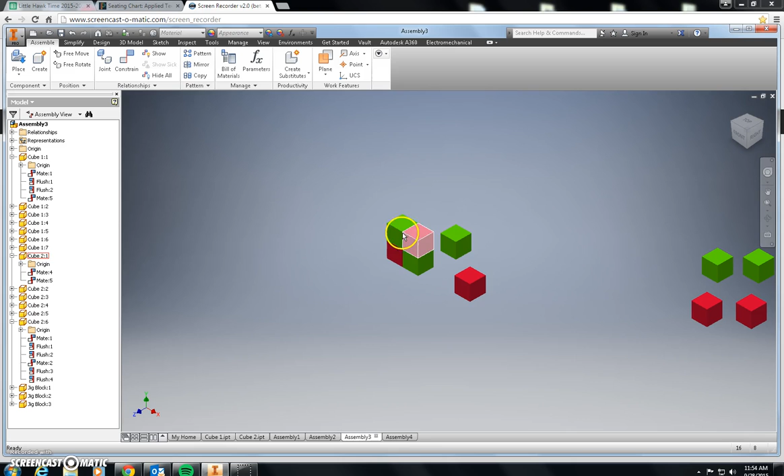As we speak, I'm recording this for later, so if you have a problem, you can watch this video. Here's what I did with the last class: we took a green and a red cube and put them together, making this piece using the most basic connections we can make in this class. We started by making these two objects and saving them. If you make an object and do not save it, it cannot be used later because it technically doesn't exist until it's saved.

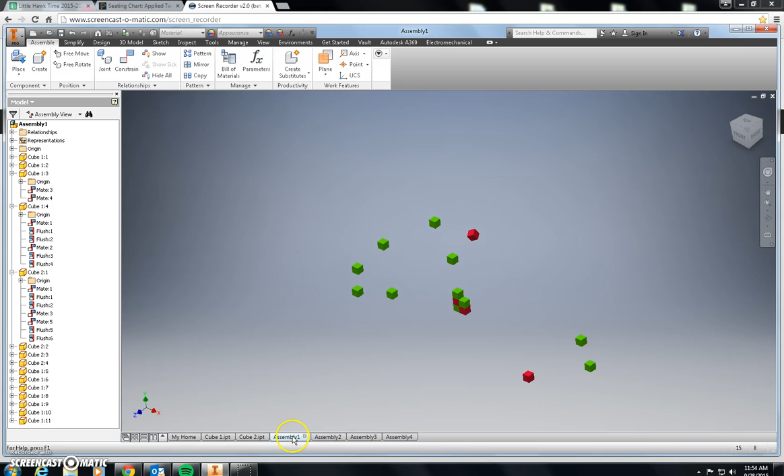So I'm going to show you how to open this assembly area, which is basically the workbench. If you look down here, I've been working all day on stuff. So I've got an assembly here, another one, another one, another one, and the original cube 2 and the original cube 1.

I'm going to open a brand new assembly area. Go to the upper left hand corner and go to the new tab. We'll drop down the menu, and instead of choosing part, you're going to choose the assembly area. If you take a look at the picture, an assembly has 3 cubes connected together, and a part is only a single cube. So just look at the picture, it tells you what to do.

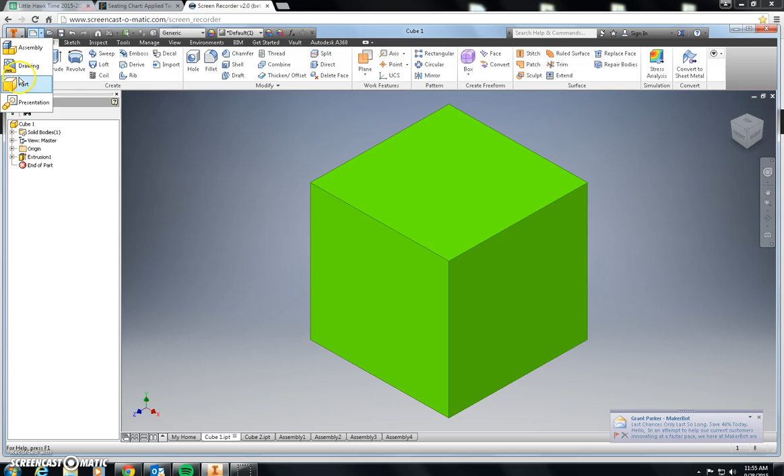So let's choose assembly, and now I have an empty workbench. There's nothing at all in there. So I need to do what a human would do, which is place objects within the workbench. This area here called Place is important—this is where you will find the work that you've created. Now there's a drop-down menu, and inside of there are some interesting things.

For instance, this one we can use later: Place from Content Center. Inside there is essentially the entire store Menards and the entire store Ace Hardware. Anything you can buy at Ace Hardware exists in there, like nuts, bolts, washers, and things. Why make them if they could be bought off the shelf? So everything in here can actually be placed in your object, in your workbench.

But I'm going to go find something I made. So I choose the Place option, and the first thing the computer asks is please tell me where it lives. So wherever you've saved it, you need to look in and drop. In my case, I went to the desktop, and I'll scroll down to my 2 cubes here. I'm going to click on cube 1 and click open, because that's the first one I'm going to put on the board.

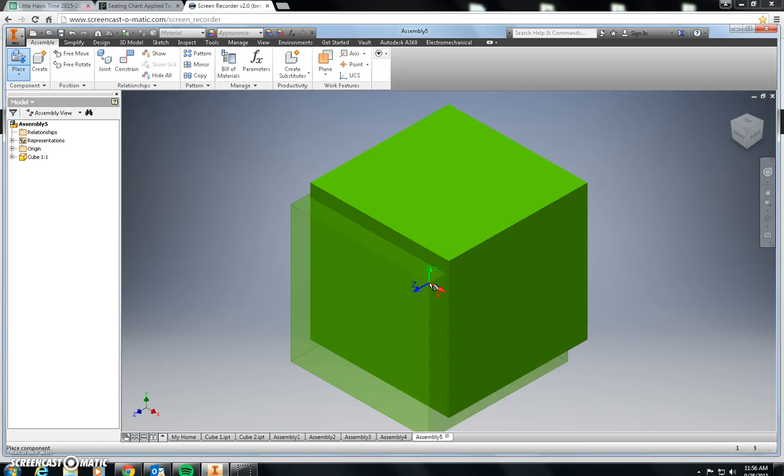Now it's hard to tell, but I'm zoomed really close, so I'm going to zoom back and click one time. Now there's my first cube. Notice I'll zoom out again and I still have a cube attached—every time you click, you get another cube. So how many cubes? I don't know.

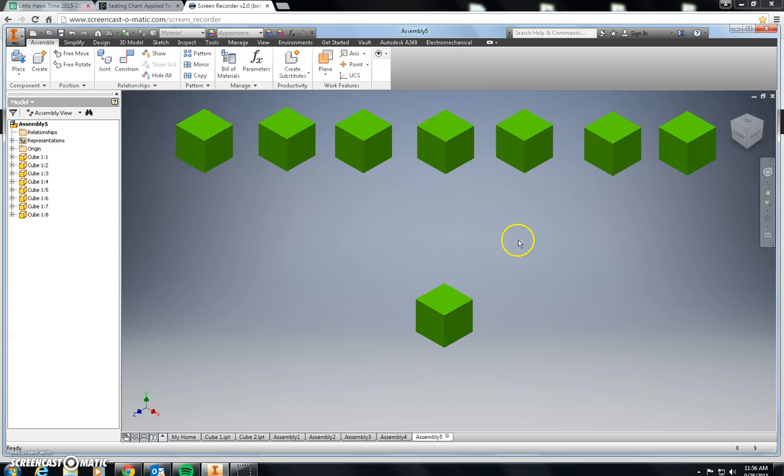Let's add some, there we go. Now this thing is still stuck on my cursor, so you can either use the escape key or right click and say OK. Alright, let's get some more stuff—let's place the other cube.

Now you can see I have a roller rest bracket here. I could bring that in too if I wanted, but I don't—I'm just doing cubes for today. So let's add some cubes. You can put them anywhere. You could put one right on top of itself, which is illogical and doesn't make sense. It allows you to do goofy stuff like that right now because these things technically are not a real thing yet. So I'm going to hit escape this time.

Okay, so what I'm going to do is take this green block and this red block, and let's take a look at our navigation cube. When I talk about the top or the front or the right side of the block, I'm talking about the block just like that. So let's talk about the tops—I'm going to take the green top.

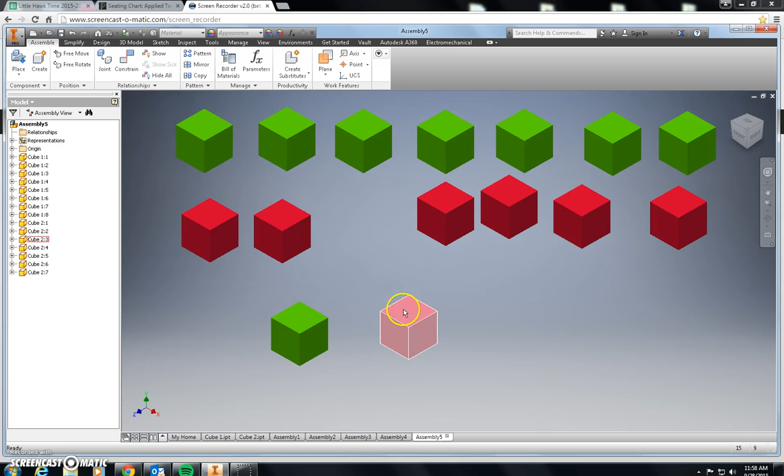I'm going to flip this cube over and put it right on top. So I'll flip it over and put it on top of there. Now that's going to lock the 2 faces together, but remember, only in plane—meaning a plane is like a flat piece of glass. It's only going to lock them together flat to flat, but it'll still slide like I did with the boxes.

The tool we're going to use for that is a tool you're going to use all the time. It's called the constraint tool. Constrain means to lock down. Remember, the objects have full rotation now, so we want to lock them down in relationship to each other. So I'm going to choose the constraint tool, and we'll talk about what kind of buttons we have here.

The first type is the mate connection, which allows me to connect faces and edges together. It's a real common connection.

The next one is using faces and edges, but having an angle included. The next one is tangent, which when Mr. Anderson was holding that toilet paper roll, you could see that has a curved edge, and if that was set flat on the table, that would be a tangent connection. Mr. Anderson is demoing there. He's holding up a tangent connection, which is essentially a cylinder up against a flat plane. And that happens in real life.

And then we have the insert tool next. The insert tool is designed to put things that are fasteners into machines. A fastener could be a rivet, it could be a nail, it could be a screw, it could be a bolt. But those things we know do not move, so they're not like an axle that has rotation. It just saves you a step. It's like, hey, this thing is stuck in there, and you can use that. We will use that later in our designs, or in our work.

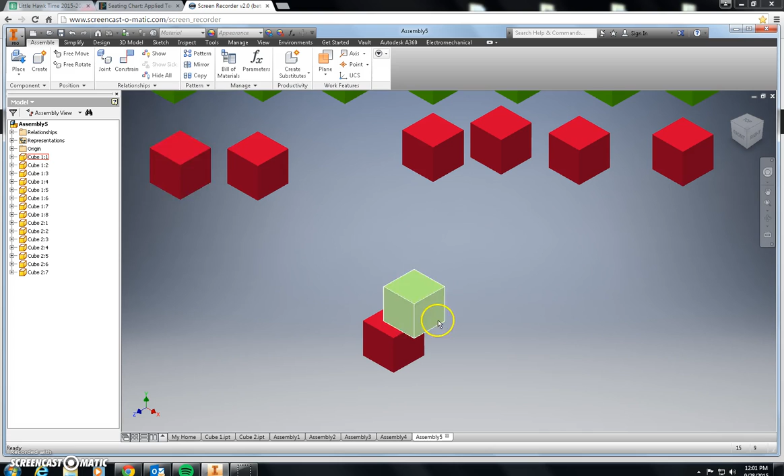You guys see that? Okay, now let's go back and let's now use the other option, which is flush. Keep the same mate type and choose flush. Now I'm going to take this option and tell this face to be flush with this face. Does that make sense? Just like you'd stack it on a table. Now those two are lined up. I'm going to click apply.

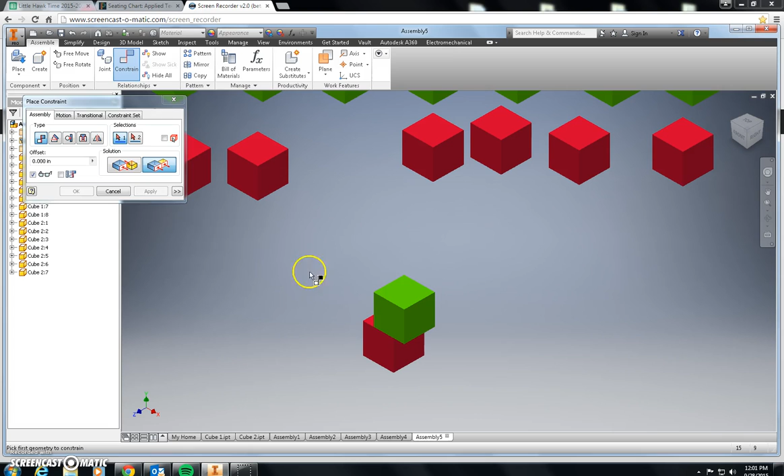Okay, now I'm going to cancel this just so I can move my object, and now I can see that yes, it is still face-to-face, it's stuck face-to-face, but I've flushed together these two faces, so it's not allowed to move in that dimension either. Both blocks are stuck together.

Do you notice in my list here, I have a colored object? That's because when you click on an object, it will show you where it lives in the list. And just like before, it's incredibly important to understand why the list is important, and this sort of goes back to our parent-child relationship talk.

Now, if I choose this green cube and it shows up in the list, I can open the plus inside the cube because I can then see the connections that I've made. When I told it to go face-to-face, that's called mate 1. You can see it highlighting on the drawing. I also added a flush as well. Those two make the block do what it does.

If I had a problem and I needed to delete one of these, you could right-click on this word flush and delete it. The only place to delete a constraint is from the list, okay? You can't do it from the drawing. Now, let me make a mistake.

I want this object to line up like that. I can't do it by hand, I have to do it with my tools. But I can move it to a spot where it's supposed to live.

Now, it should be technically impossible for me to take this face and touch the top. So if I took the right face, I'm going to try to snap it to the top of the red. And because of my other constraint rules, it should tell me it's illogical and can't happen.

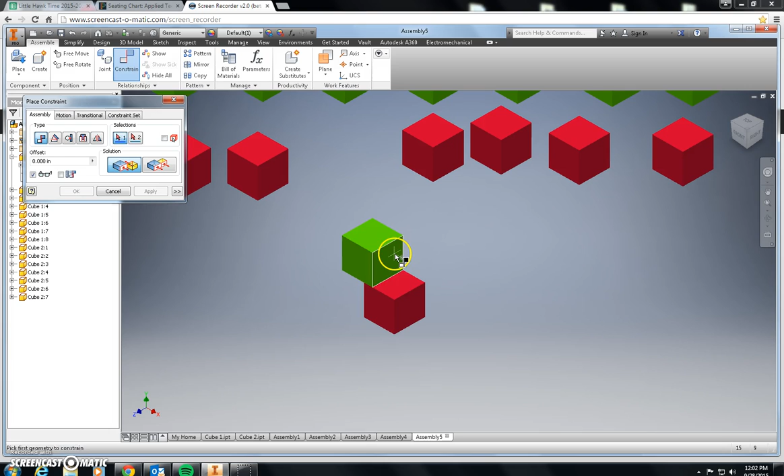So I should not be able to tell this face to touch this face, because the block would have to rotate, and the computer says you can't do that. It's like telling someone to go left and right at the same time, or keep your feet on the ground and jump as high as you can. It just can't. It's an impossibility.

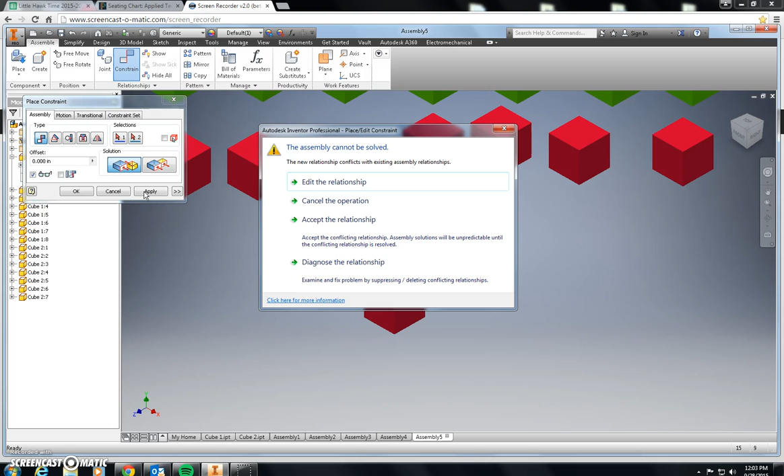So you've got to realize that if you get a warning like that, you need to find the block. In this case, I can click on the red one and open the plus. Notice that these two blocks share the same stuff. If I go up to a block here and click on it, which is this one down here, and open it up, it has nothing in it, because I haven't done anything with this one yet, or any of the other ones.

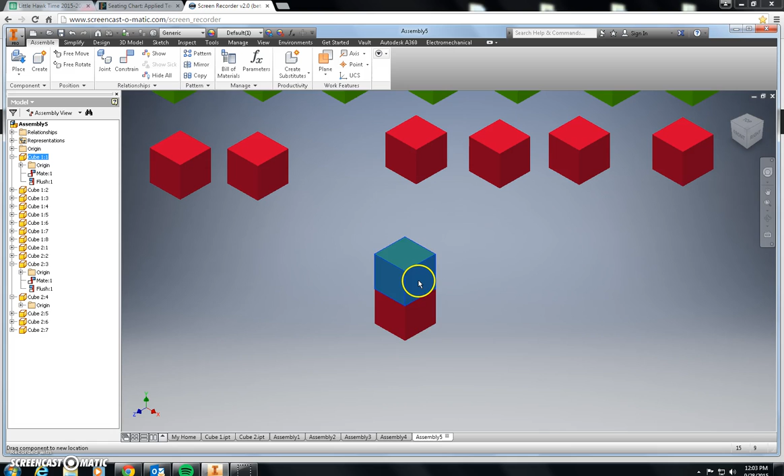Let's flush up these two faces now. I usually push the objects apart to make it easier to select. Constrain, choose your flush option again. It almost always chooses mate by default, which means automatically. Choose that face and this face, apply that, and cancel. Now I've got my first chunk.

Okay, why is that sticking together? Let's take a look. I told those two faces to be flush, and these to be flush. So with those three rules, it's stuck.

Let's go ahead and add another green down below. Let's use edges this time. Edges are nice. Constrain - this time I'm going to take this edge and attach it to this edge. Now it looks pretty good, but watch what happens when I try to move it. Not only does it slide up and down, but you see how it hinges on that edge? It's sort of like a hinge pin, so it twists around.

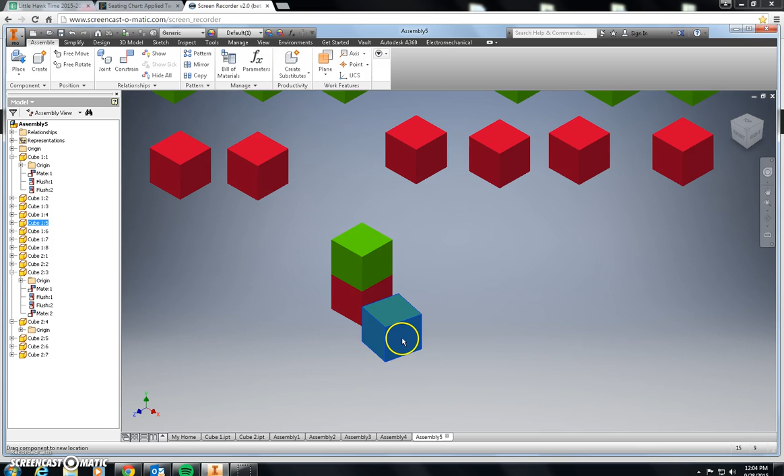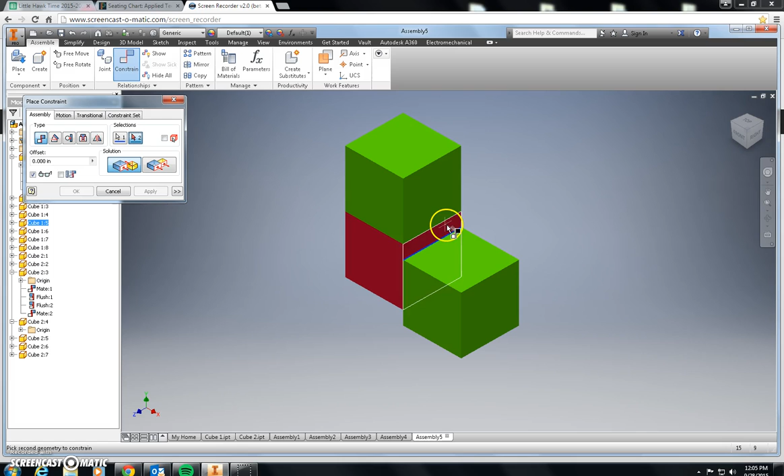I don't mind that edge is connected, but I also want to connect a couple other edges. Let's take this long edge and connect it to this edge here, connecting the green and red together. So I'm going to choose this edge and tell it to be in line and snapped to this edge. And what that's done - I'm going to apply and cancel.

Let's choose this guy, open it up in the list. You can see I've added that mate and that mate - those are those two blue lines you see there. And those two actually locked it down as well, because if it's lined up with this edge and lined up with this edge, it can't move. So that's kind of a shortcut to do that.

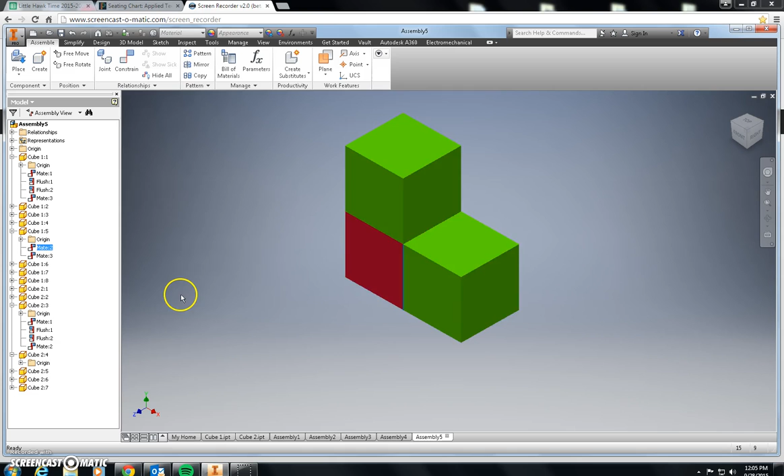Let's add our next one in here. Let's go face to face to start, just to mix it up. I'm going to choose this face attached to this face. Apply, cancel. But look, if I look at it from the front, it's in there, but it's stuck like that, right? So let's take this edge and touch this edge.

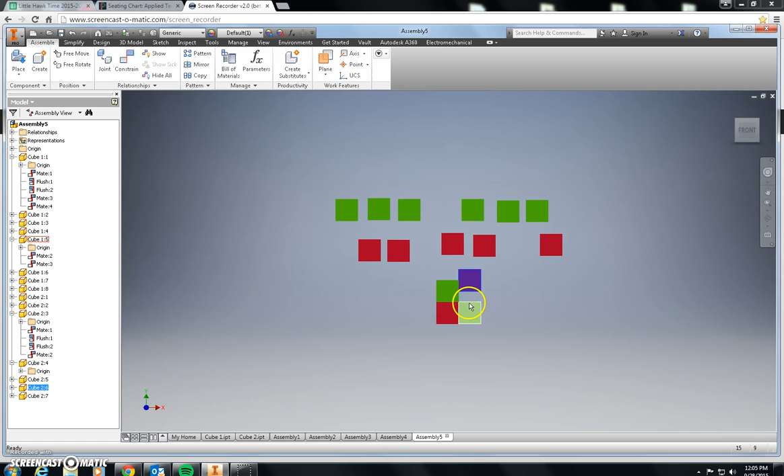Constrain, edge to edge. So in this case I have an edge and a face together, but it did the same thing. Let's choose it, open it up in my list to find out what happened there. That face and this edge - it's hard to see when it's blue - that face and this edge together make that work.

So your goal is to basically put six of these together in a pattern like that, and when you grab it, it should not move. So if that moves, let's add another connection. Constrain, edge, edge. Apply, cancel. Grab it - nothing should move. Every one of these objects, when I click and grab, should move as a whole, by itself.

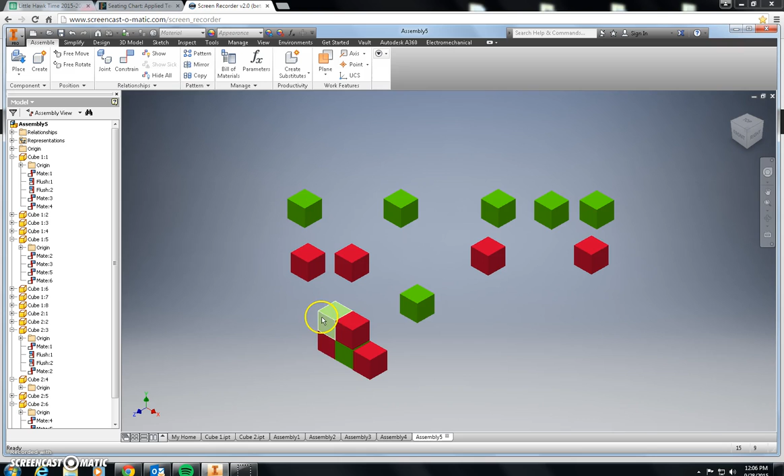A lot of times I come over and I'll see something that looks kind of like it should work - like a block is sort of connected together, sort of like this. And then I come over and say, oh, let's see if it works. Oh no, that's not working at all. Make sure it's actually connected, okay?